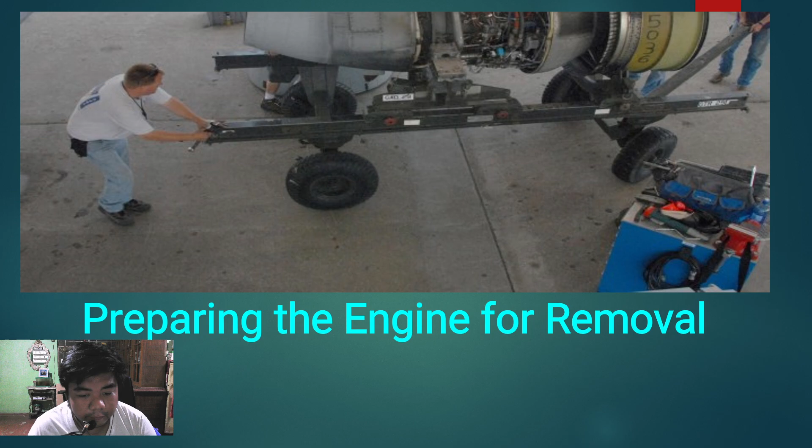Preparing the engine for removal.

Lesson 8. Before starting to work on the aircraft or reciprocating engine, always be sure that the magneto switch is in the off position. Aircraft engines can be started accidentally by turning the propeller if the magneto switch is on, because this can automatically be on since the magneto produces electricity.

After ensuring that all fuel to the engine is shut off, disconnect the battery to eliminate the possibility of a hot wire starting a fire. If it is anticipated that the aircraft will be out of service for more than 6 days, the battery should be removed and taken to the battery shop and placed on charge.

These sentences show us that this is also a cause of fire, as we can read here. We need to disconnect the battery, because if we don't, there will be a short circuit and it may cause fire. So what we are going to do is return the battery, and it should be replaced.

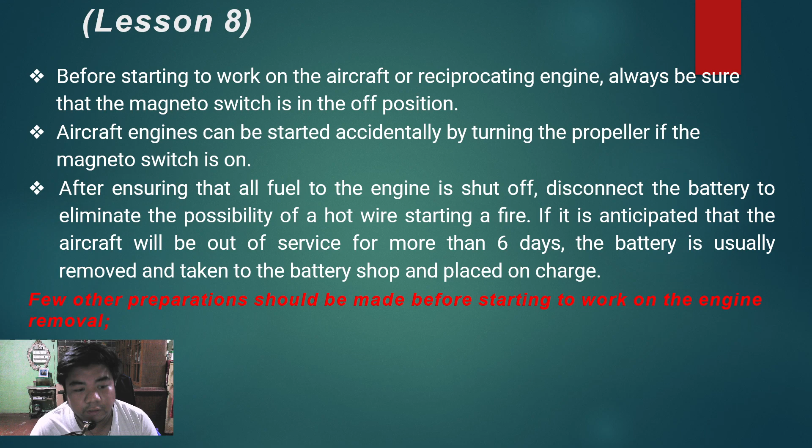Here are the notes. Make sure that there are enough fire extinguishers near at hand to meet any possible emergency. Check the seals on these extinguishers to be sure the extinguishers have not been discharged.

These sentences show us that in any case of fire or accidental fire, we need a fire extinguisher, because if there is a flame that is quick to burn, we have a fire extinguisher to extinguish the fire.

We should also check if the seals are not broken, because if the seals are broken, the extinguisher might not work, or it would not help extinguish those fires.

Second is check the wheel chocks if they are not in place. The aircraft can and probably will inch forward or back during some crucial operations.

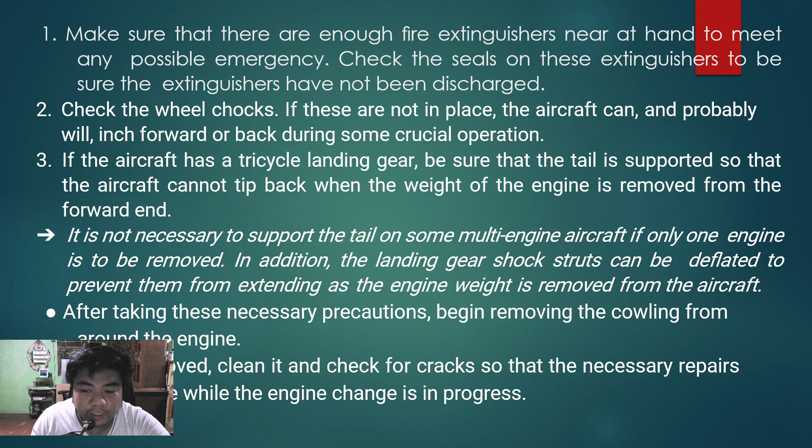And while removing, we can also deflate the landing gear shocks, because if we do that, this would prevent the extending of the engine weight while we are removing something on the aircraft.

Place all cowling that does not need repairs on a rack where it can be readily found when the time comes to reinstall it on the new engine. After removing the cowling, the propeller should be removed for inspection or repair.

These two paragraphs show us that we should put those things that we use in place so that we would not be, in Tagalog it's termed malito, confused about those things, so that we should be in order, and we should also remove the propeller while we're doing some inspection or repair on the aircraft.

Next topic is draining the engine. Place a large metal drip pan on the floor under the engine to catch any spilled mixture or oil. Next, secure a clean container in which to drain the oil or corrosion-preventive mixture.

This shows us it's like changing the oil of a motorcycle. We are putting, looks like somehow a pan, sanlaan in Tagalog, so that we would not spill any containment of oil on the ground, because it's a hard time to clean those oil.

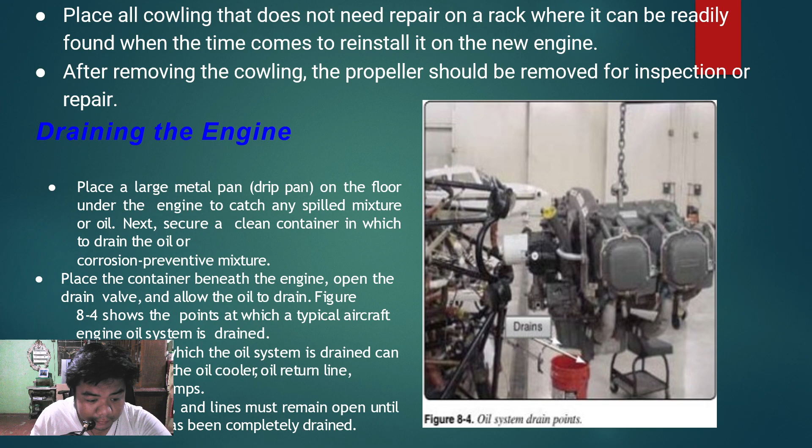After draining the oil, reinstall all drain plugs and close all drain valves. Then wipe all excess oil from around the drain points.

After draining, we should assemble it back, and after that we will wipe the edge of the drain valves, so that the oil would not spill out.

Next is the electrical disconnects. Electrical disconnections are usually made at the engine firewall. Also, do not leave long electrical cables or conduits hanging loose, since they may become entangled with some parts of the aircraft while the engine is being hoisted.

Next, it is good practice to coil all lengths of cable and flexible conduit neatly and tie or tape them to some portion of the assembly being removed. Wrap moisture-proof tape over the exposed ends of connectors to protect them from dirt and moisture.

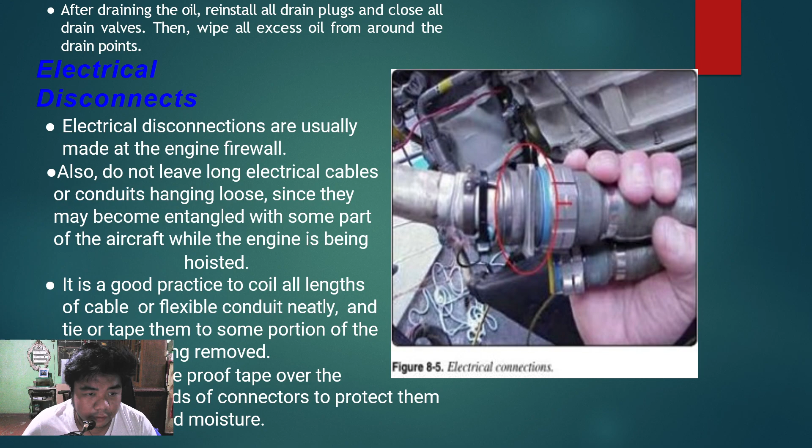The next topic is disconnection of engine controls. The engine control rods and cables connect such units as the carburetor, fuel control, throttle valve, and mixture control valve with their manual controls in the cockpit.

The controls are sometimes disconnected by removing the turnbuckle that joins the ends. Here in the report visual aids, here are some examples of it.

Then the rod end assemblies determine the length of the control rod by the distance they are screwed on it, and they are locked into position by check nuts.

We can see that we can check the rod end assemblies if they are locked by using check nuts.

After the engine control linkage has been disconnected, the nuts and bolts should be replaced in the rod ends or bell cranks to prevent their being lost.

In this paragraph, this shows us that the connections of both nuts and bolts are replaced because the reason is this would prevent it from being lost.

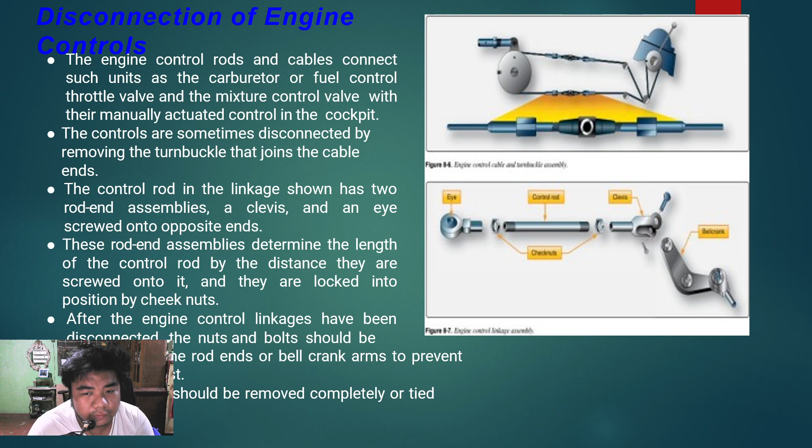Disconnection of lines. The lines between units within the aircraft and the engine are either flexible hose or aluminum alloy tubes joined by lengths of hose clamped to them.

This explains that the lines here in the picture are connected by either a flexible hose or an aluminum alloy.

Lines that must withstand high pressure, such as hydraulic lines, are often made of stainless steel tubing.

Those lines that are used to withstand high pressure are made up of stainless steel tubing because stainless steel tubing is somehow a strong steel, and it would withstand high pressures.

Most lines leading from the QECA are secured to a threaded fitting at the firewall by a sleeve nut around the tubing.

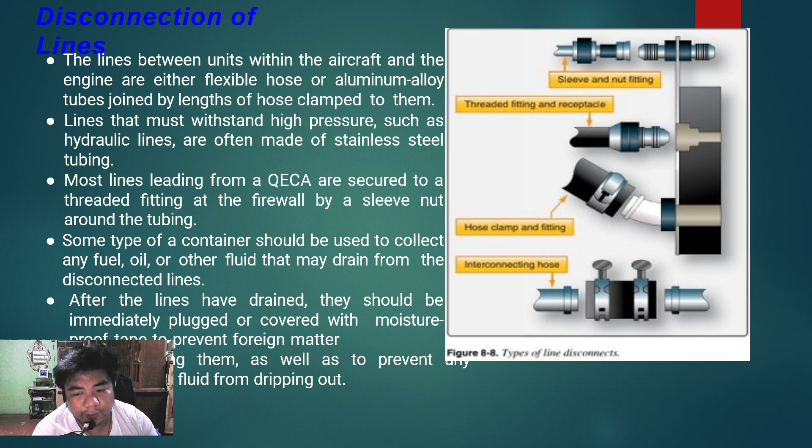As what we have said earlier, after we drain, we are intended to put a cover on it to prevent moisture or any foreign matter, because it's too small, we cannot see it with our naked eyes.

Removing the engine. If the QECA is being removed, the engine mount accompanies the engine. The mount remains on the aircraft if only the engine is being removed.

Before the engine can be freed from its attachment points, a sling must be installed so that the engine's weight can be supported with a hoist when the mounting bolts are removed.

A sling is needed on the engine's weight because it supports it while we do a hoisting and while the bolts are being removed. Engines or QECAs have marked points for attaching a hoisting sling. The location of these attaching points varies according to the size and weight distribution of the engine. We have different markings on the aircraft engines, and these markings determine the size and weight of the engine.

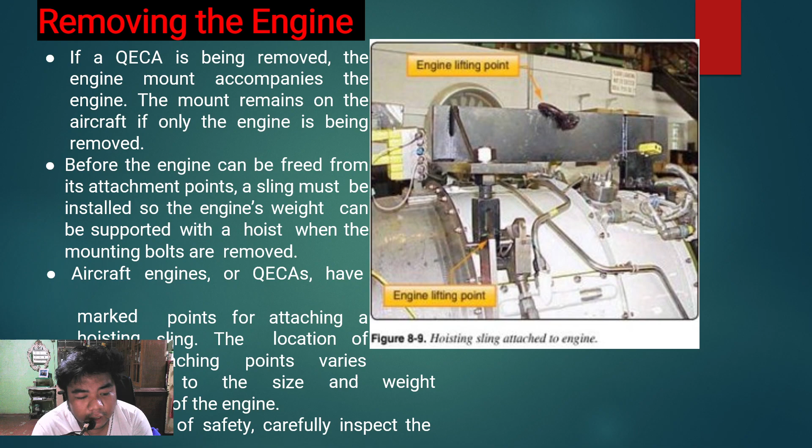Next is a matter of safety. Carefully inspect the sling condition before installing it on the engine. Before attaching the sling to the hoist, be sure that the hoist has sufficient capacity to lift the engine safely. The engine center of gravity, CG, should always be taken into account as the engine is hoisted. It's like the weight and balance.

You cannot, it would be a hard time carrying a heavy object. If it's too heavy, it would really be a hard time. And it's written here that the hoist has sufficient capacity to lift the engine safely. Because if it's too heavy, it may damage the engine. That's why we need a sufficient capacity.

The next is this hoist assembly is specifically for removing engines, and other manufacturer for the purpose. The assembly is for physically removing engines and other assemblies from aircraft. Manufactured for the purpose, some frames are fitted with the power operated hoist.

This should be used with care. Some frames are fitted with power operated hoist. This should be used with care, since considerable damage can be done if an inexperienced operator allows a power operated hoist to overrun.

It's like being a mechanic, you need to be experienced to handle a different and difficult job. And the hoist and frames should be checked for condition before being used to lift the engine. We should always check the hoist and frame, because if it is damaged, or let's say it has corrosion, it may possibly damage the frame and the hoist, and it would also damage the engine. It's like a triple kill, in gamer's terms.

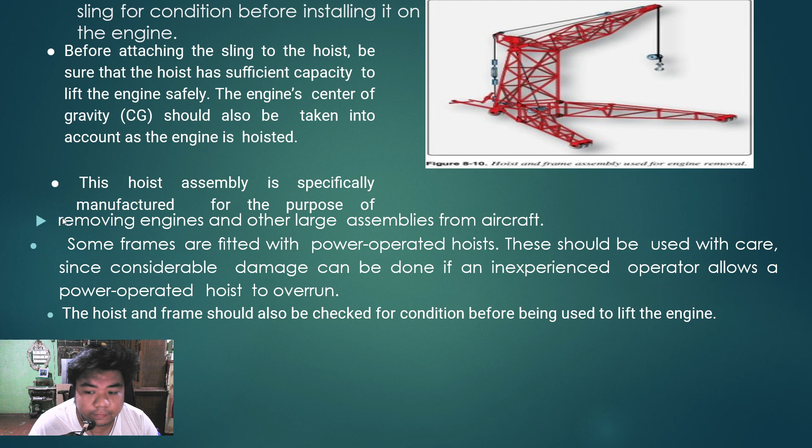The next is hoisting the engine. Before the hoist is hooked into the engine sling, let's check the aircraft tail supports and the wheel chocks. Before the hook is hooked on the engine sling, we are required to check if the aircraft tail supports and the wheel chocks are in place. We are obliged to check all of those.

Next is fasten lines to the engine at points on the sides or rear, so that the engine can be controlled as it is being hoisted. Fasten lines, because if it is not fastened enough, it might damage the engine while being hoisted. And it may make the job easy to control it while being hoisted.

Hook the hoist onto the sling and hoist the engine just enough to relieve the engine's weight from the mount attachment. We should hook it on the right place, and this would just give us a nice room so that we can carry the engine easily.

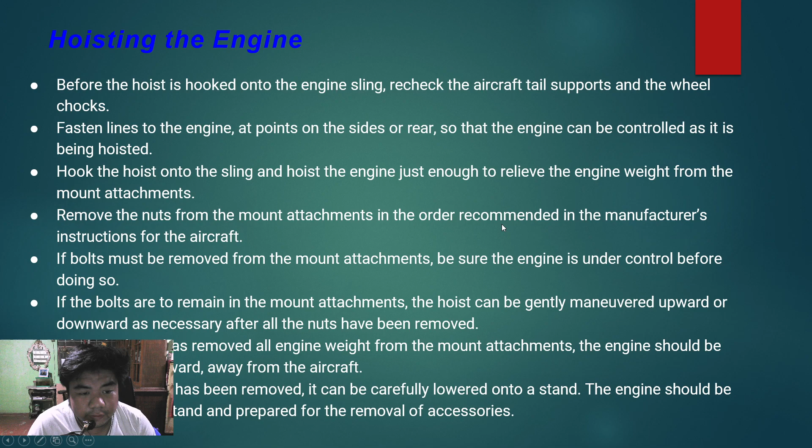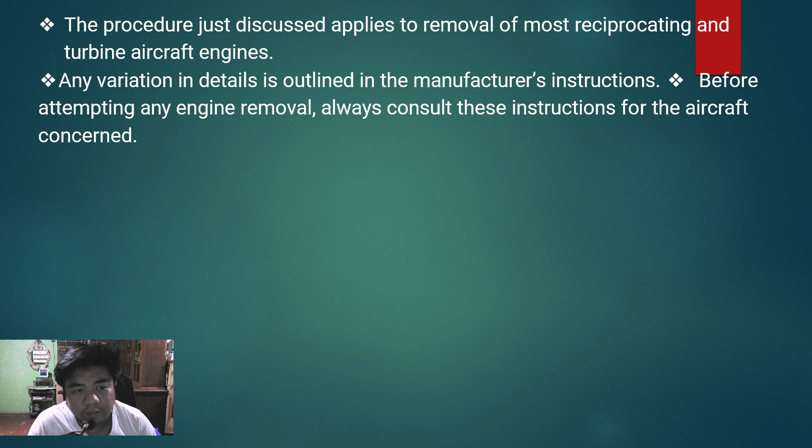we are recommended in the manufacturer's instructions for the aircraft. Like if we connect it to the second paragraph here, we should always consult the instructions of the manufacturer's manual. Because if we would not consult it, we might have a hard time fixing the aircraft. It's like a computer: the problems and the solutions are on Google, while on the aircraft it's all in the manufacturer's manual, and all of the answers or solutions to the problems on the aircraft are already written in it.

Hoisting and mounting the engine for installation. The new or overhauled engine is ready to be hoisted for installation. Move the engine stand as close as possible to the nacelle in which the replacement is to be installed. The engine stand may be moved to the hoist frame position so that the engine can be hoisted easily into the nacelle. While hoisting, we should put the engine stand in position so that it may be easier for the engine to be hoisted into the aircraft nacelle.

To prevent injury to the crew or damage to the aircraft or engine, be sure that the engine is steadied when moving the hoist frame. It's like, let's be sure that the engine is not moving, because it may cause injury to the aircraft mechanic or the crew of the aircraft.

Engine nacelles are rarely designed for the engine to be fitted and bolted into place as though it were being mounted on a bare wall. The engine must be guided into position and mated with its various connections such as mounting bolts, holes, and exhaust tailpipe. There are rare cases that the engine nacelles are designed so that engines are connected and fitted and bolted, like being mounted on a bare wall.

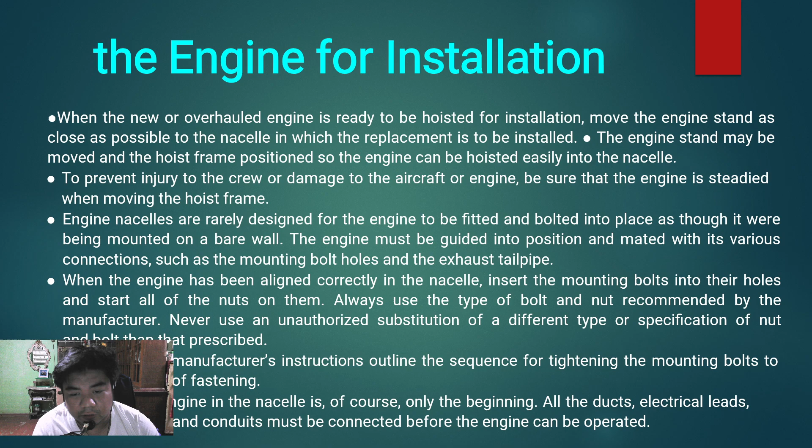Connections and adjustments. There are no hard and fast rules that direct the order in which units or systems should be connected to the engine. Each maintenance organization normally supplies a worksheet or checklist to be followed during these procedures. Worksheets or checklists are needed because they help us know the first thing we are gonna check, the second thing, the third thing, and so on and so forth.

The list is based upon past engine installations on each particular aircraft. If this is followed carefully, it serves as a guide for an efficient installation. If we're gonna follow the checklist or the worksheet, we would have an efficient installation.